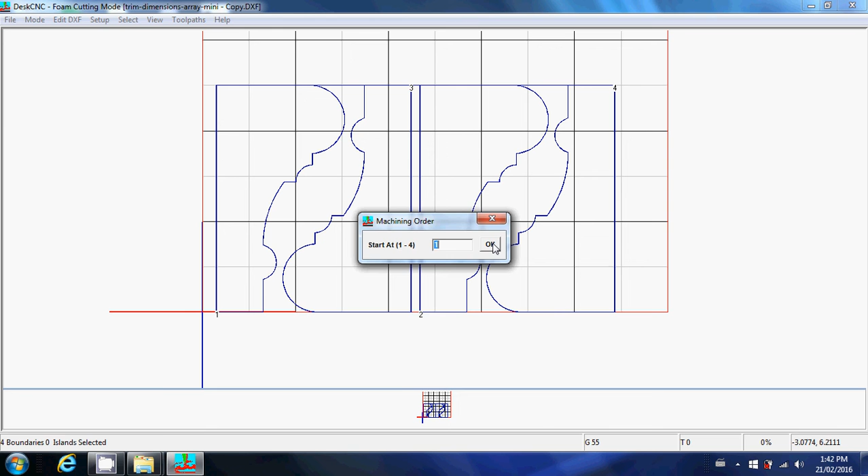And this is kind of handy because if you have a huge long line, like 30 profiles, and you get to 15 and you make a mistake, you can start at 15. So we're going to start at 1. And down here it says click on the region in sequence starting with 1.

So we're going to click on number 1. Then it says click next sequence, number 2. So we're going to click on the next one, and it changes to a 2. And so on, we're going to click on number 3.

And see, I clicked it, but it didn't quite change. So we need to make sure we click on it. And yep, so it should say number 4, but that's the last one. So now we're done, it goes 1, 2, 3, and 4, and that's great.

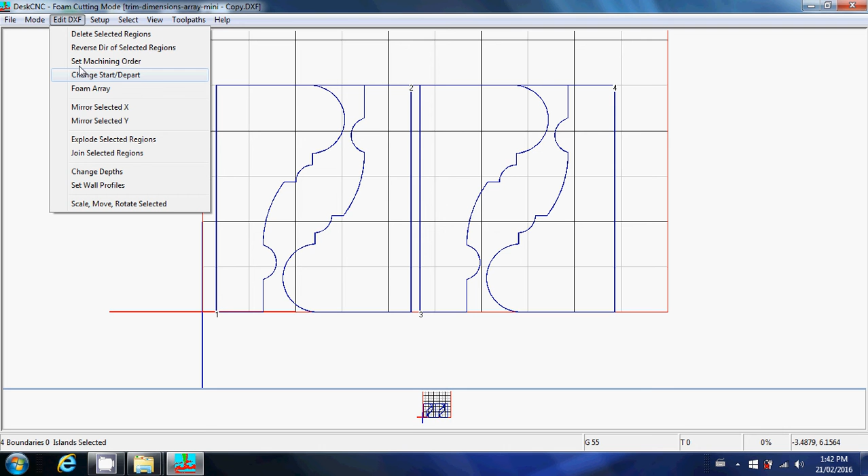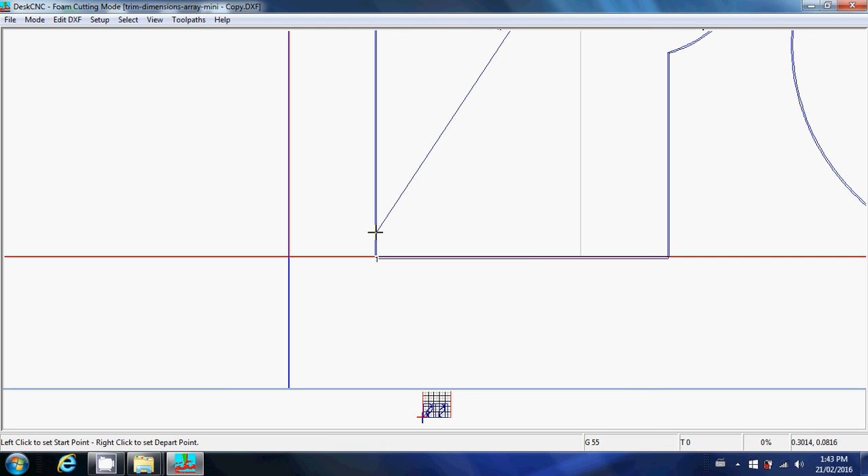So we'll go select all again, edit DXF, and we're going to go change start and depart. And now we're going to show Desk CNC where we'd like the wire to go through these profiles. So we can left click, and that's where Desk CNC is going to enter the profile.

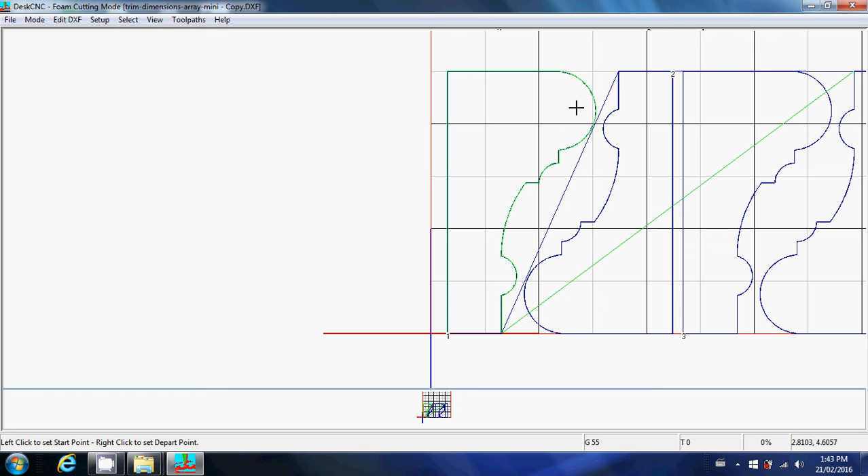And then we right click, and that's where it's going to exit the profile. If we back up here, we can see that the top part of the profile is green and the bottom part is blue. That indicates the wire is going to travel through the bottom first and then come back on the return trip on the green portion.

And all these lines here, we don't have to worry about that. We're not there yet, so that's not going to be a problem.

Actually, this isn't going to work for me though. I'd rather the wire travel through the top portion first and then come back on the bottom. The reason for that is, as far as moldings go, it'll cut the profiles out a lot more square if we cut the tops out first and then come along the bottom.

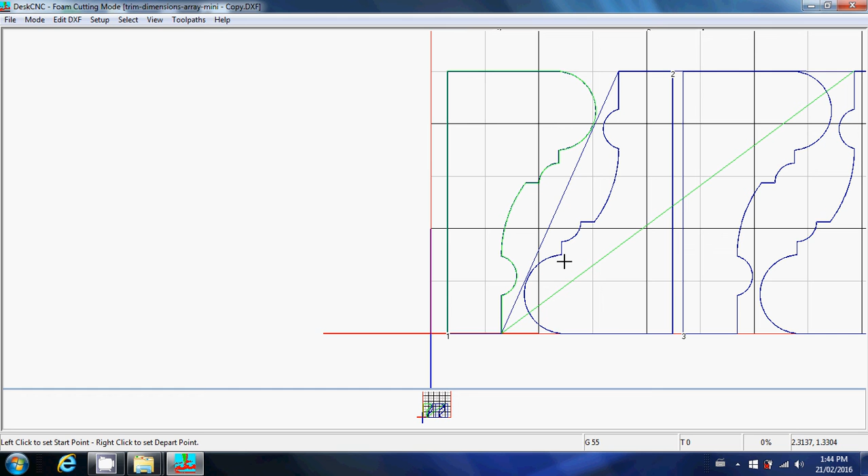To end the cut, what we're going to do here is go select all, edit DXF, reverse direction of selected regions, and what that does is tell Desk CNC to go the opposite direction.

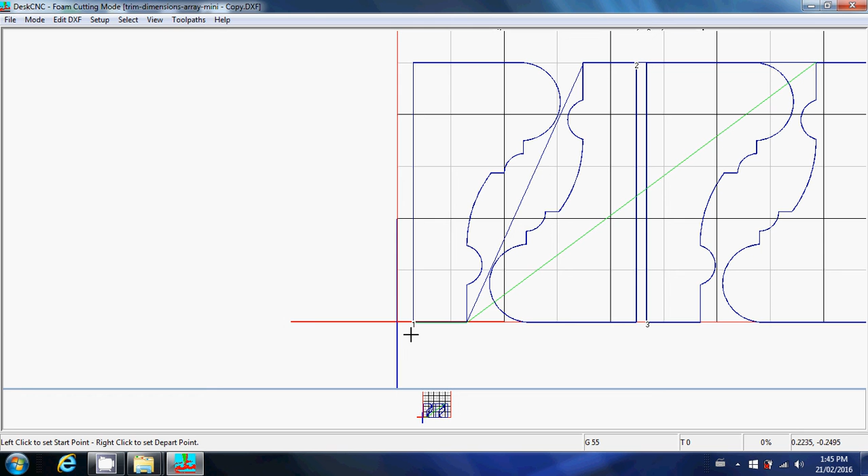So we'll try that again. Select all, change start/depart. We will left click where we'd like the wire to enter the foam shape, left click to enter, right click to depart. If we back up, we can see that looks great. It's going to cut out the top part first, and then come back on the bottom.

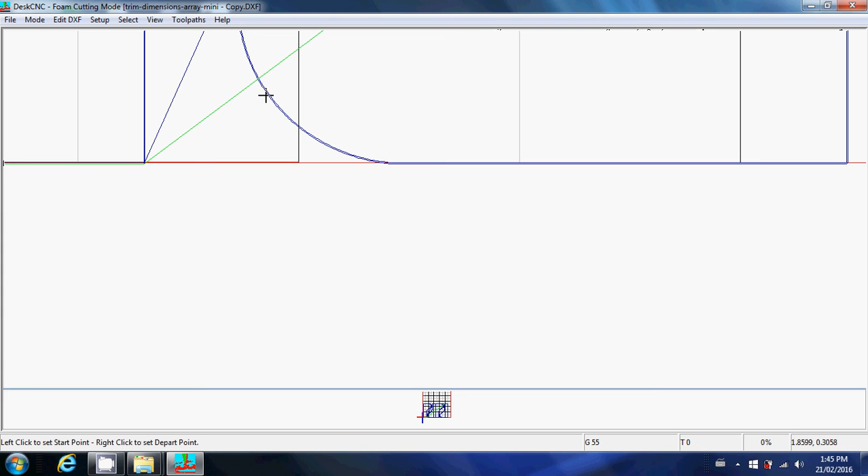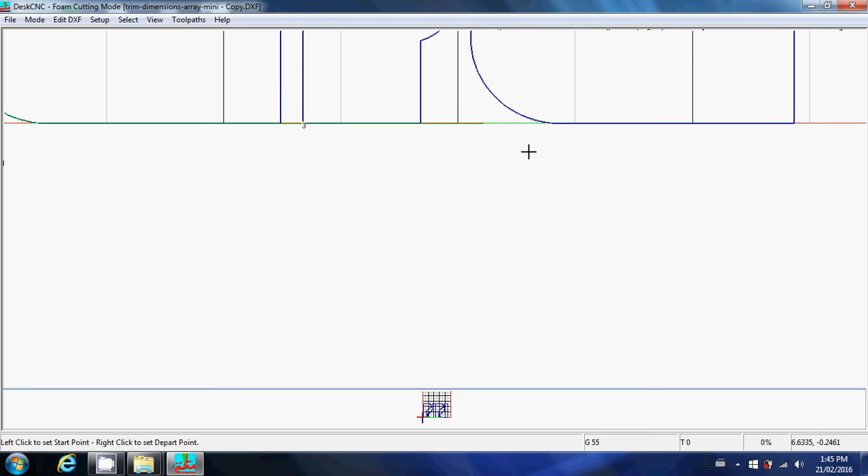Then we want to left click on the next profile where we'd like the wire to enter, and right click where we'd like it to exit the profile. Left click where we'd like it to enter, right click where we'd like it to exit the next profile, and left click where we'd like it to enter the last profile, then right click where we'd like it to exit or stop the trip on the last profile.

So we can see here that the tops are all blue and the bottom of the profile is green. That tells us the wire is going to travel around the tops first, all the way along, and on the return trip it'll cut out the bottom of the profiles and return to the starting point.

You can see here I did it different ways for the different profiles as far as where to start and depart. If I was actually cutting these moldings out, I'd probably do it here, just to prevent the shape from burning, because it would linger in this tight angle for a second, but that gives you the general idea anyways.

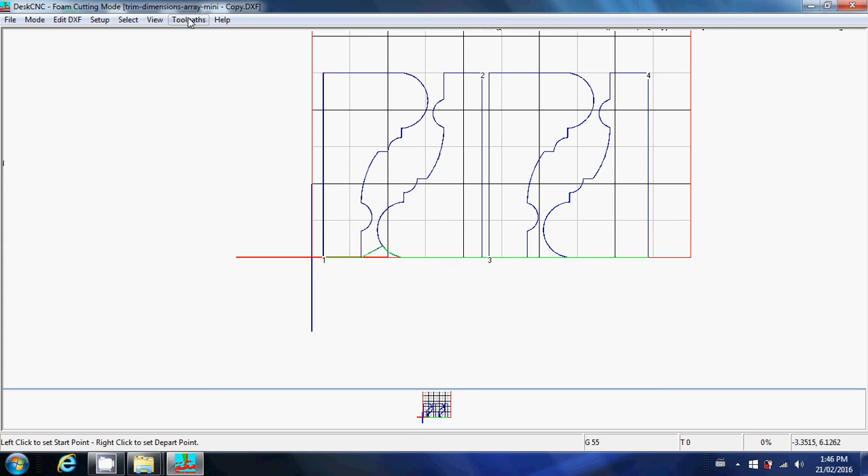Okay, so that looks great, and what we're going to do is go to Toolpath, 4-axis foam cut, feed rate of 30 so it'll run at 30 inches a minute, approach height of 0 — that's going to work great.

Then we click create, and then we're ready to save our file. So you go to Toolpath, run machine, and of course save your file where you can find it.

As I mentioned before, I like to use Google Drive, and the reason for that is I can save it on my laptop and it'll be available on the computer I use at the shop that runs the CNC Hotwire.

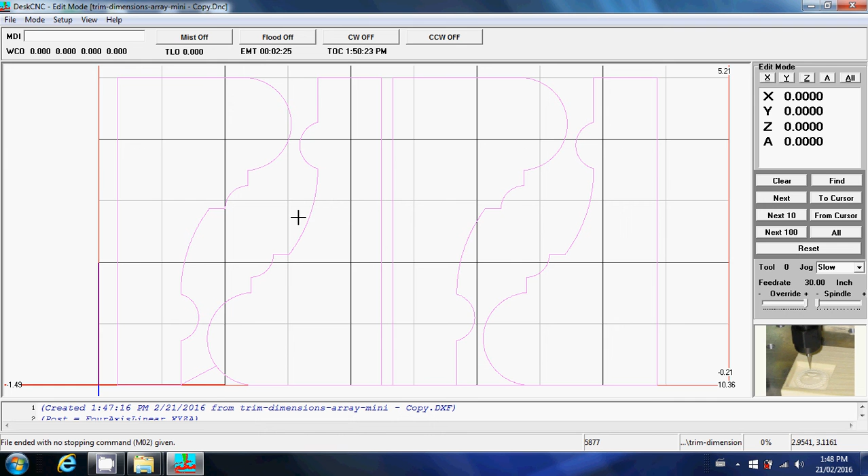Alrighty, so that is saved. And the G code, you can see, kind of have an idea of what's going to happen when you look at these shapes here. You can see the profiles that'll be cut out in the path of the wire, and below here you can see the G code, and that's it.

You take that file that you saved and load it into Mach 3, and you'll have a file with multiple shapes ready to be cut.

Alright, that's the basics for cutting multiple shapes. I hope this video was helpful for you.